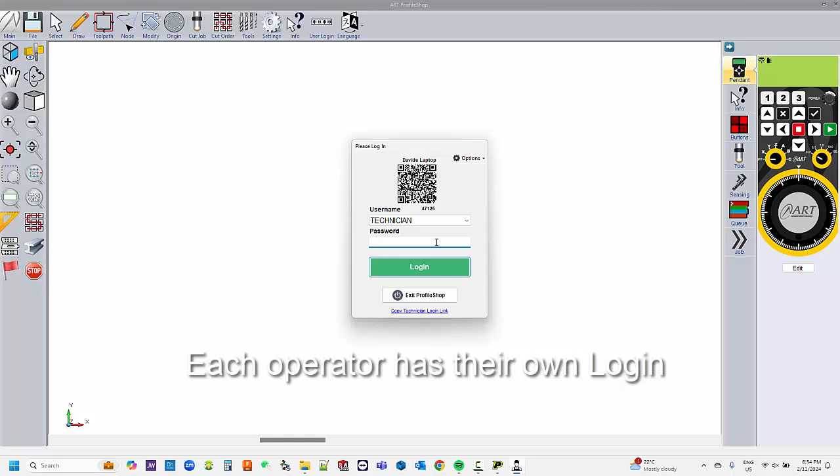Today we're taking a look at the world of steel fabrication, exploring a machine that's been making serious waves: the Metaltek XB1200. You might be thinking, okay, another piece of equipment, what's the big deal? But by the end of this deep dive, you'll see why it's an absolute game changer, especially for steel fabricators and structural engineers. What's fascinating is the convergence of trends in the industry right now. Steel fabricators are being asked to do more, faster, with tighter tolerances than ever before.

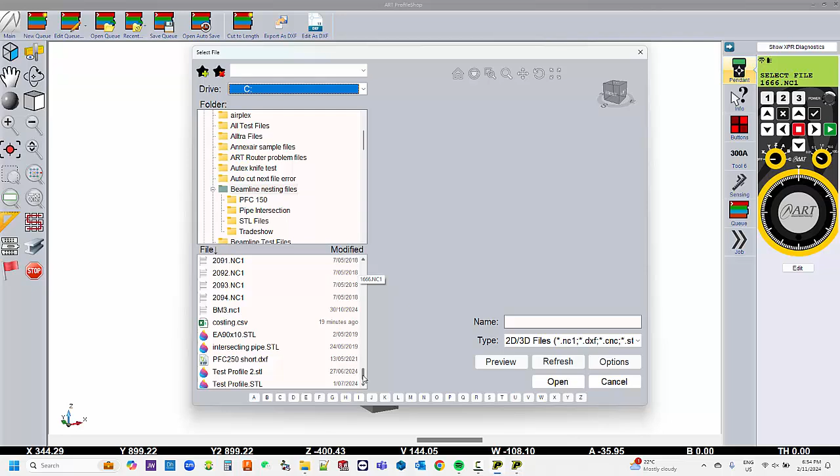At the same time, everybody's pushing towards digitizing workflows and using data to optimize production. The Metaltek XB1200 sits right at the intersection of all of that. We've got brochures, articles, even some technical specs here, all about this Metaltek XB1200.

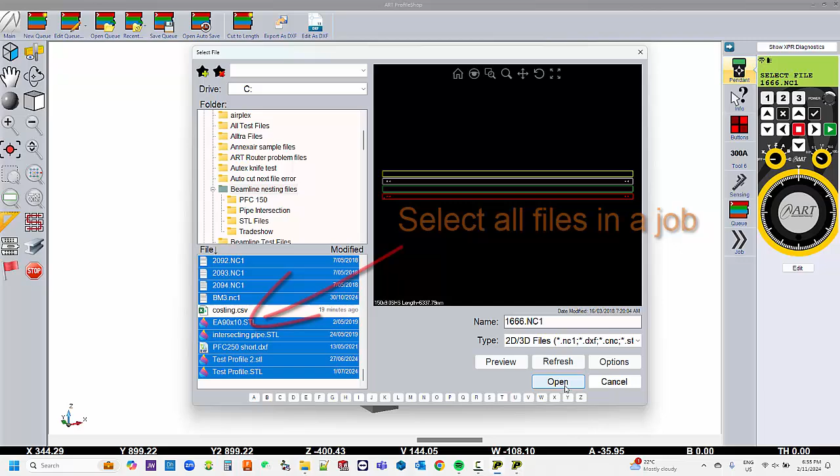One of the things that really jumps out is its versatility. It can handle pretty much any structural steel profile you can imagine: beams, columns, angles, pipes, flat plates, you name it. The Metaltek XB1200 is what's called a robotic CNC plasma beamline machine.

CNC stands for computer numerical control, which basically means it's guided by a computer for incredible precision. And plasma beamline refers to the cutting technology, super hot plasma that cuts through steel like butter.

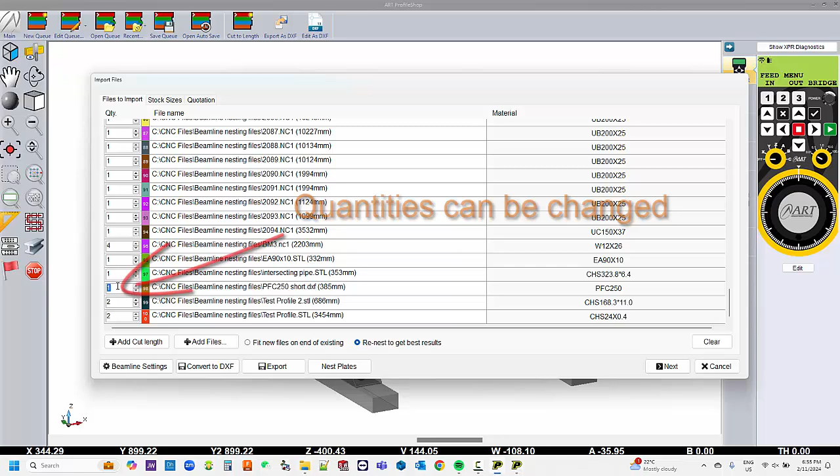That combination lets the XB1200 not only cut the steel with amazing accuracy, but also mark parts with things like part numbers and welding instructions, eliminating all those manual steps later on. So I'm already seeing how this saves a ton of time and reduces errors, but let's break it down even further.

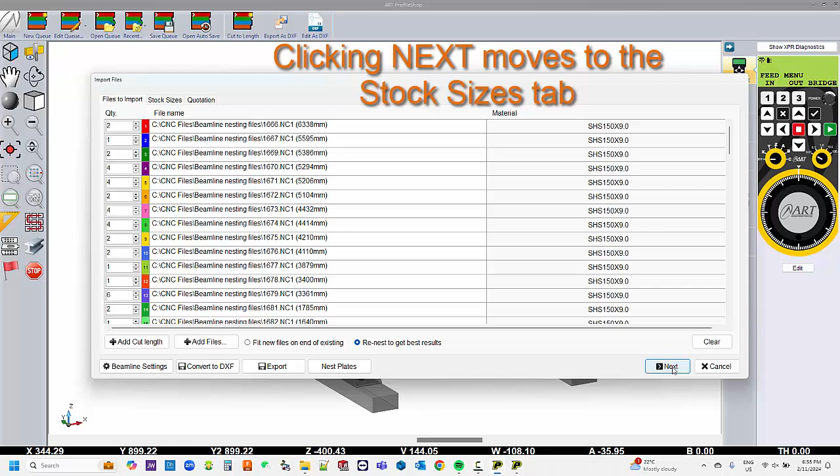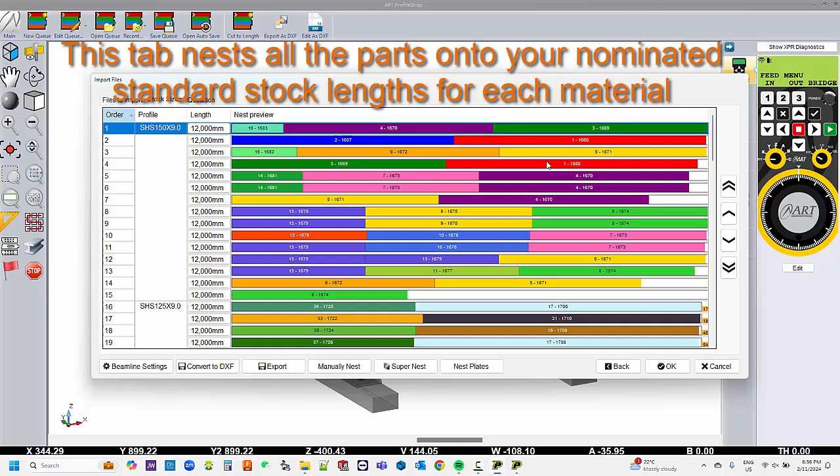The Metaltek XB1200 offers major benefits in three key areas: quality, productivity, and maybe most surprisingly, ease of use. Starting with quality, the XB1200 uses true hole technology, which ensures every hole is cut to the exact size and shape with no taper. So when you go to put a bolt in, it fits perfectly every single time. That's got to be a dream come true for any fabricator.

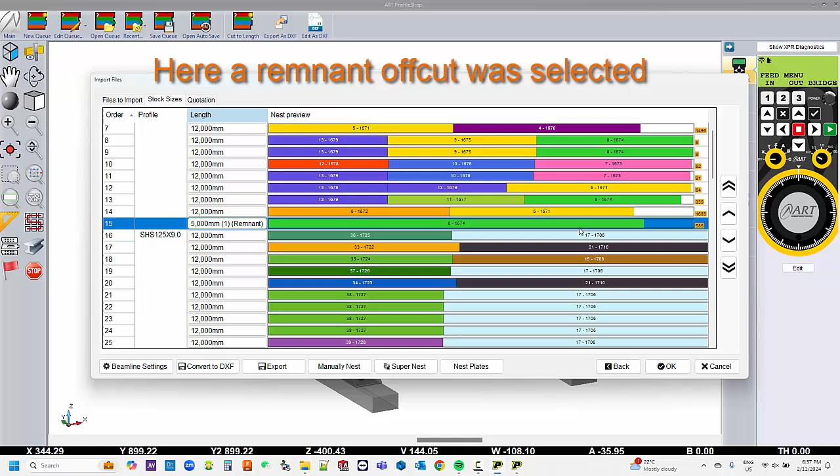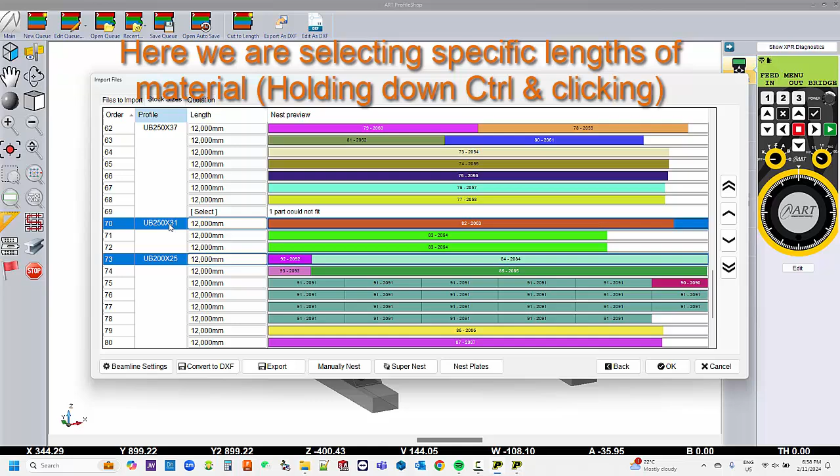No more time wasted trying to force ill-fitting parts together. And speaking of saving time, let's talk productivity. The XB1200 has a whole arsenal of features designed to streamline the fabrication process. For one thing, it's got this user-friendly touchscreen controller, the ART ProfileShop V4, that lets operators modify the cutting parameters on the fly, so you don't have to stop the whole process and reprogram the machine.

What really catches my eye is this wireless remote control. It's almost like controlling a giant robot with your smartphone. That gives operators way more flexibility and control on the shop floor, so they can align and set up jobs faster without being tethered to a control panel.

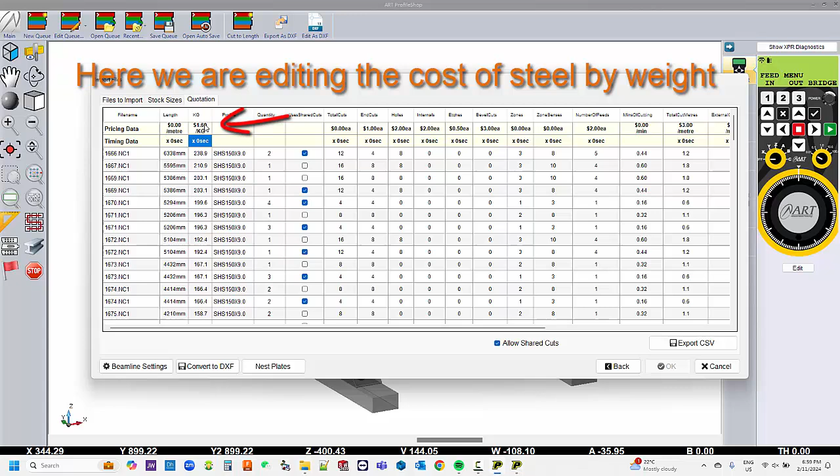Then there's the etch marking feature we touched on earlier, which automatically adds part numbers, welding instructions, alignment marks, basically all the information needed for downstream processes right onto the steel parts. It's amazing how they've thought of every little detail to maximize efficiency, like they sat down with experienced fabricators and said, tell us your biggest pain points and we'll engineer solutions for you.

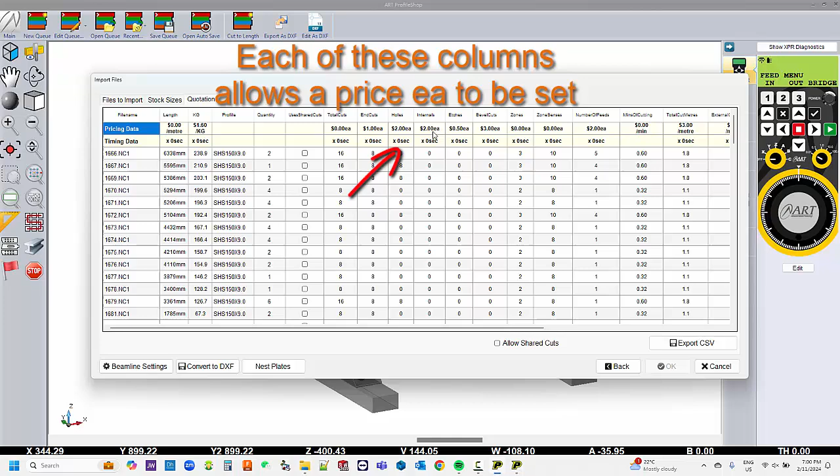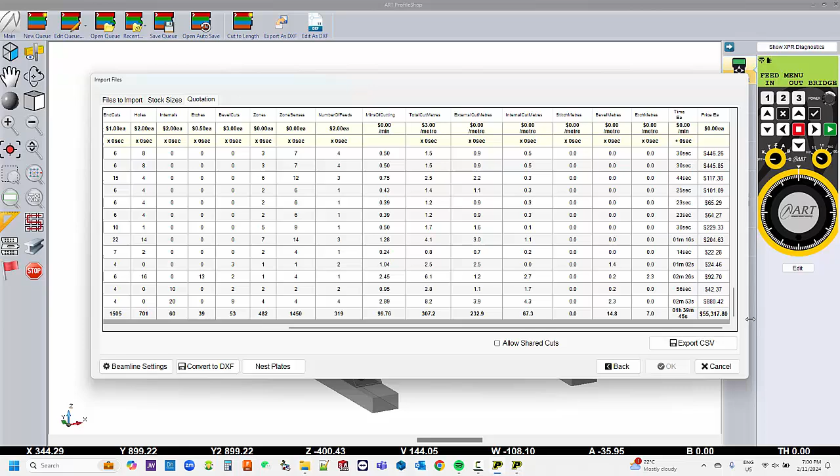And they didn't stop there. The XB1200 also excels in integrated workflow, able to integrate with existing CAD and MRP systems. So you can take a design straight from your CAD software and send it right to the XB1200, no manual data entry or file conversions. That streamlines the data transfer, eliminates potential errors, and makes the whole process incredibly efficient.

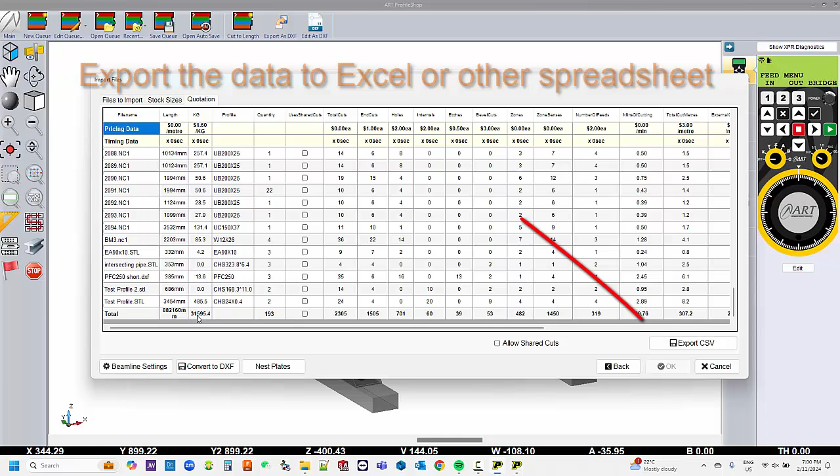And for those who love data, the XB1200 provides real-time reporting on things like cut times, consumable usage, and completed parts.

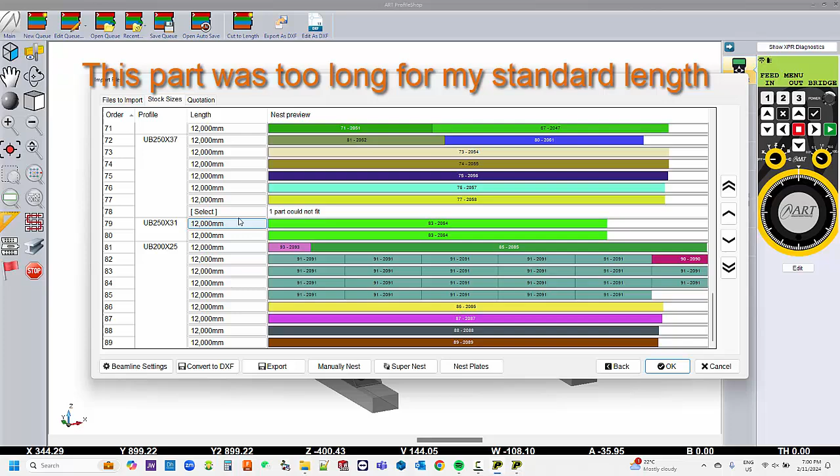That kind of data can be super valuable for optimizing production, identifying bottlenecks, and making data-driven decisions. It's like having a built-in efficiency expert right there on the shop floor.

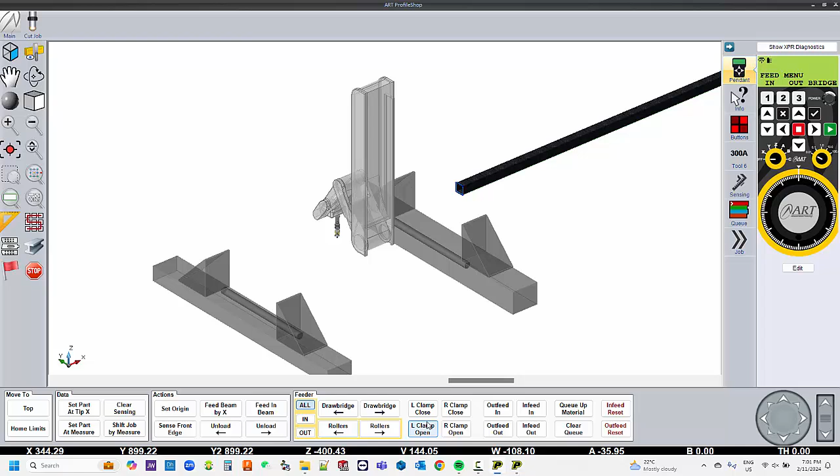But it's not just about speed and data. The XB1200 also seems to really prioritize safety. ART has built in a ton of safety features. The automatic fume extraction and filtration systems, for example, meet the strictest OH&S requirements, creating a safer, cleaner environment.

Cleaner air, less noise pollution, benefits we can all appreciate. It really shows a commitment to responsible manufacturing, which we're seeing more and more companies prioritize.

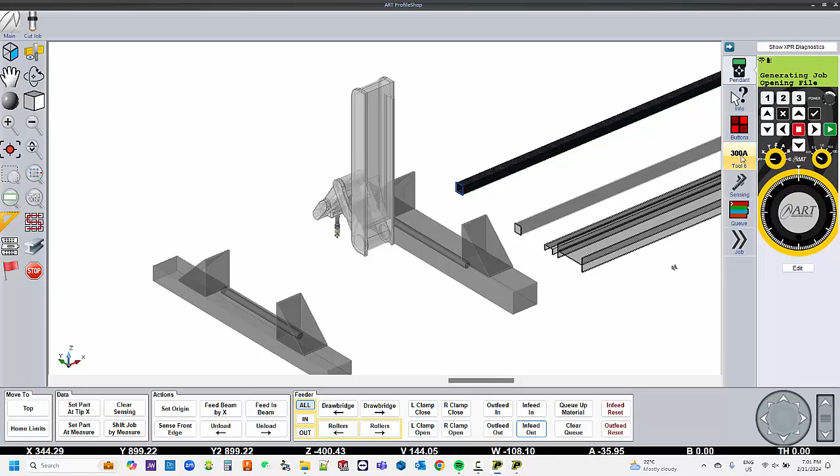So we've covered quality, productivity, and the positive impact on safety and the environment. But this machine sounds incredibly sophisticated. How do you even begin to operate something like this? That's where the ease of use comes in. ART has gone to great lengths to make the XB1200 surprisingly user-friendly.

It's got wireless networking for easy integration with computer systems. Thank goodness, you don't have to run cables all over the shop floor.

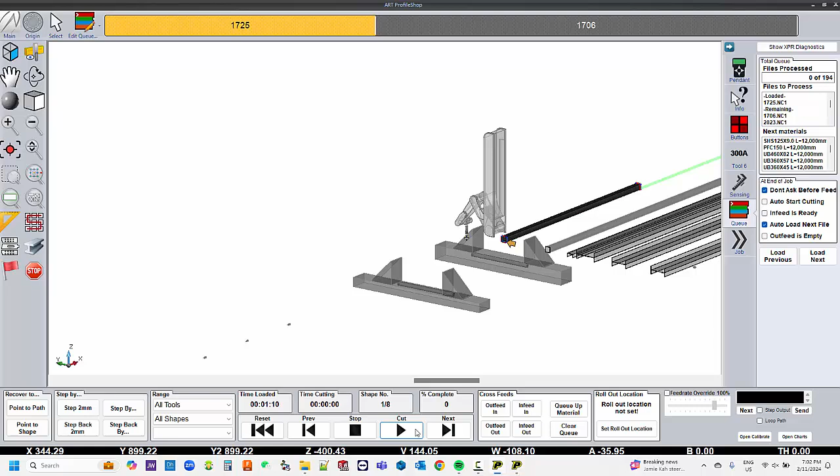But what if you do run into a problem? Is there support available? Absolutely, they offer remote access for on-demand technical support. So if you've got a question or an issue, help is just a click away.

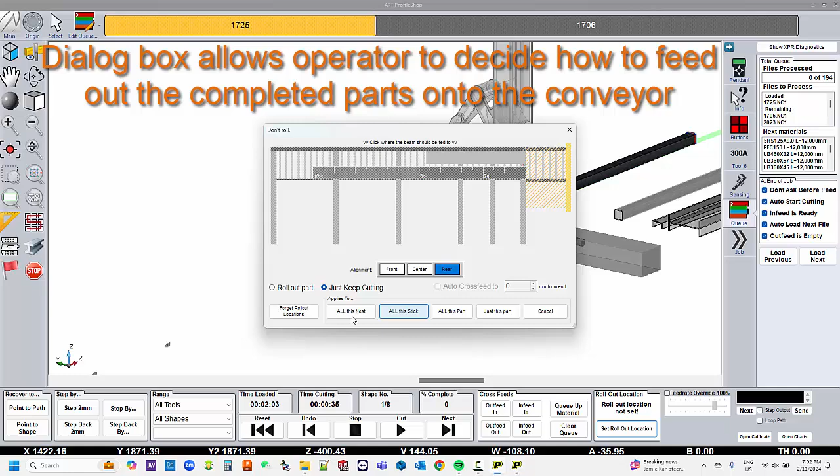And to make sure operators are confident and skilled, ART provides a bunch of different training options, both on-site and at their factory. So whether you're a seasoned fabricator or just starting out, you've got the support you need to really get the most out of the XB1200.

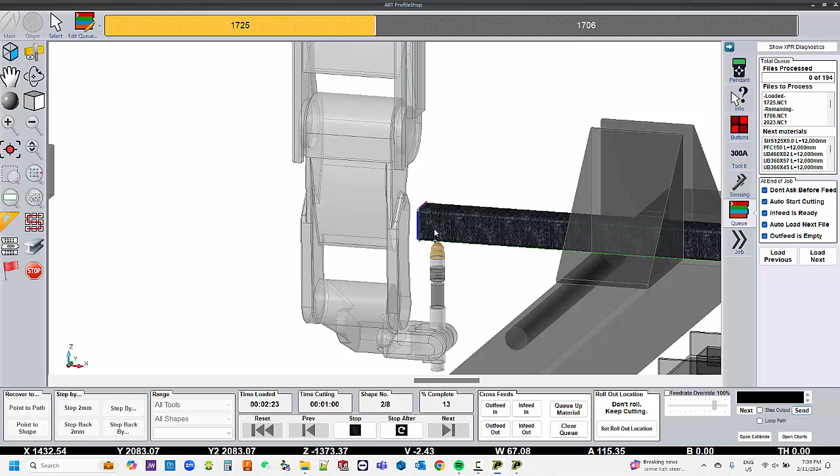Let's dive into some of its more specific capabilities. One that really stands out is the automatic material handling. Imagine a system where steel beams, columns, plates are automatically loaded, moved through the machine for processing and outputted, all with minimal manual intervention. That's what the XB1200's in-feed and out-feed conveyor system does. It's like this perfectly choreographed dance of steel, minimizing manual labor, streamlining the whole workflow.

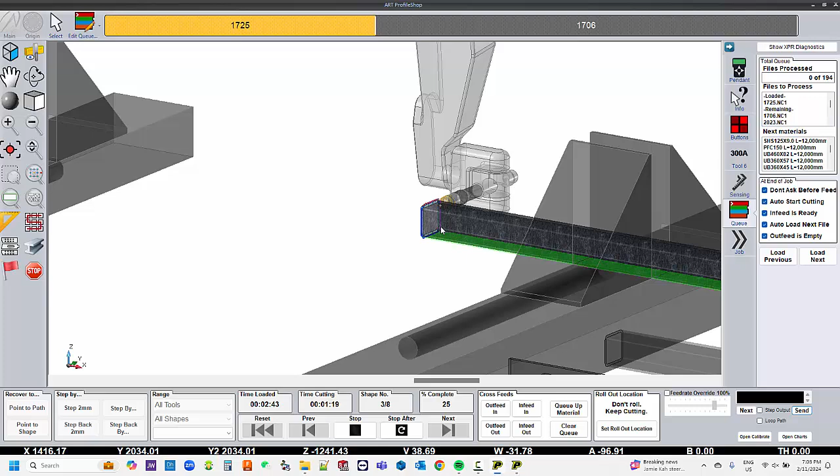What else can this thing do? Remember the robotic arm? That arm doesn't just move material around. It lets the XB1200 cut and mark on all sides of a piece of steel, even underneath. So you're telling me you can cut a rectangular hollow section on all four sides, including those tricky 45-degree bevels. Exactly. It opens up a whole world of possibilities for complex cuts and fabrications.

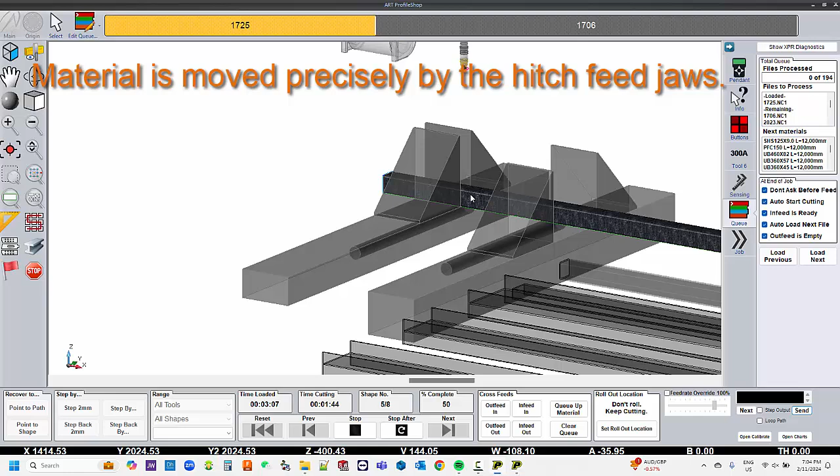My mind is blown. And you mentioned it uses Hypertherm XPR technology for plasma cutting. What makes that so special? Hypertherm is the world leader in plasma cutting technology, and their XPR systems are known for speed, precision, and cut quality. The cuts are cleaner, there's less material waste, and the consumables last longer, which saves you money in the long run.

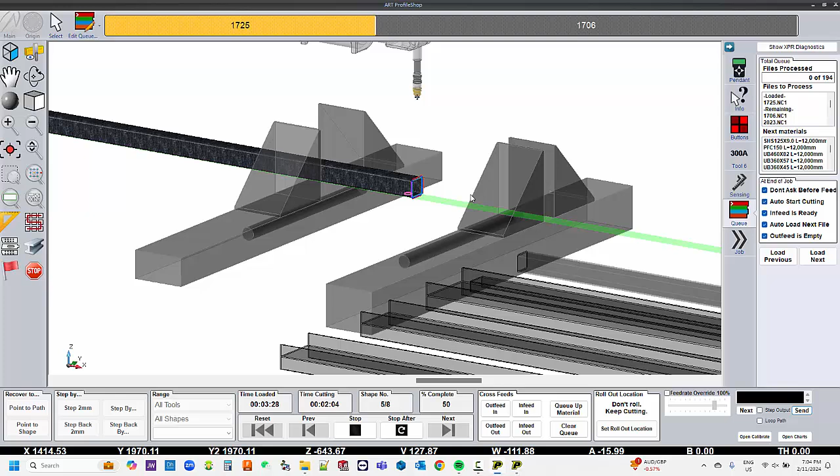So it's not just about the features themselves, it's about the quality and reliability of the components as well. But with all this talk about high-tech features, I'm sure some listeners are wondering, how practical is this machine really for a typical steel fabrication shop? Do you need special software or training to operate it?

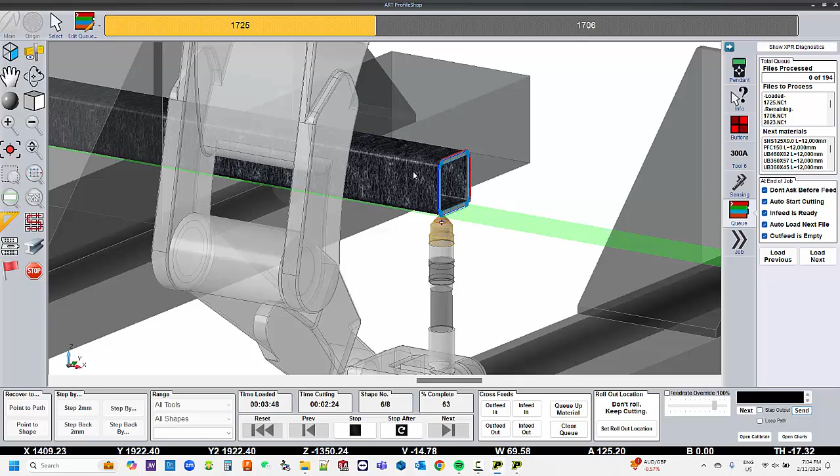Luckily, we've got some answers. Let's tackle some frequently asked questions. First, software compatibility. Do you have to invest in expensive proprietary software to run the XB1200? Please tell me it's not another software subscription I have to worry about. Nope, the answer is no. The XB1200 is designed to integrate seamlessly with the software you're already using.

It can import files from standard CAD programs, Tekla, AutoCAD, ProSteel. No need to learn a whole new system or spend hours converting files. Huge relief. Sounds like they really thought about making this machine as accessible as possible.

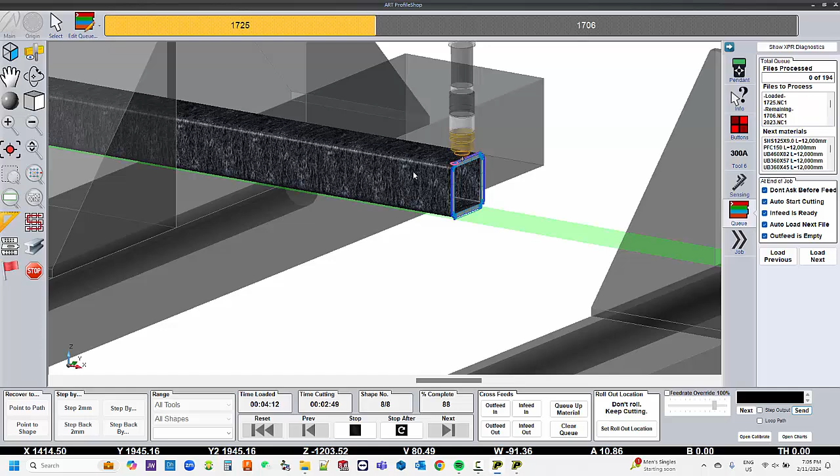But what about file types? Can it handle a variety of formats? Absolutely, NC1, DXF, even 3D models like STL and STP. It's truly multilingual when it comes to file formats. So no matter what software you're using or what type of files you're working with, the XB1200 can handle it.

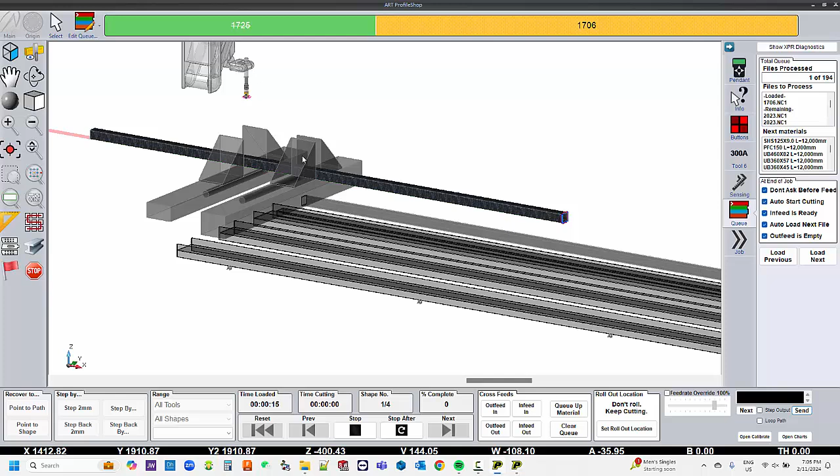Impressive. But let's get down to brass tacks. How do you price jobs on this thing? The controller is really smart about this. It gives you a detailed spreadsheet that takes into account all the variables of a job.

Number of cuts, holes, material length, etch marking details — you can use this to create accurate customized quotes. No more guesswork or relying on outdated pricing models. That's a level of precision any business owner would appreciate.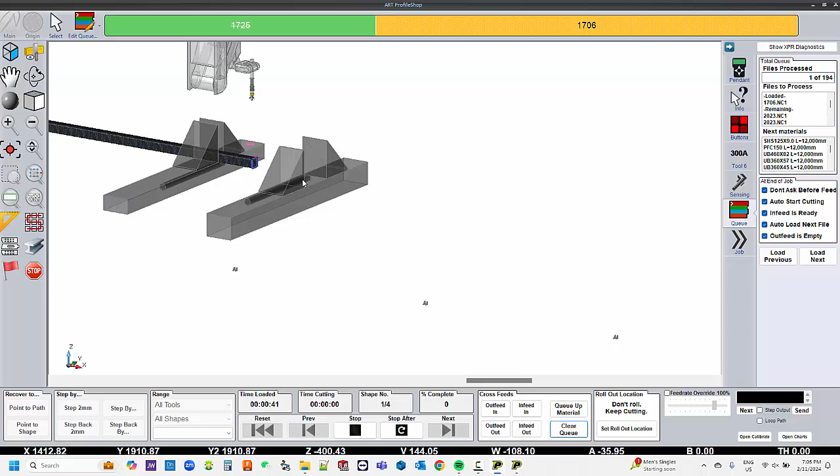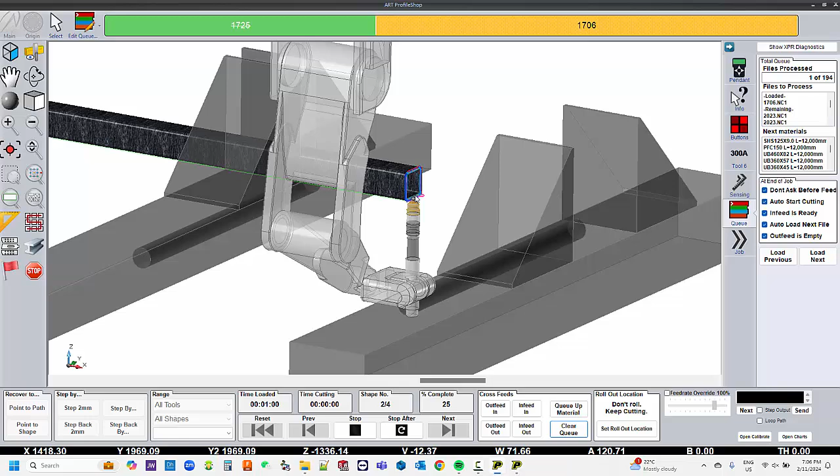What about those moments when you want to double-check everything before you actually commit to a cut? Is there a way to preview the file? Of course. The controller has a built-in preview function, so you can see exactly what the machine's going to do before you hit go. And there's even a desktop version of the software, so draftspersons can check files in the office before they're sent to the shop floor. Talk about peace of mind, knowing that you can catch any potential errors before they become costly mistakes.

Speaking of minimizing costs, are there any hidden fees for extra functionality? Do you need to buy separate modules to unlock all of the XB1200's capabilities? Nope. The XB1200 comes fully loaded — all the features we've been talking about, from 360-degree processing to etch marking, automatic material handling — they're all included right out of the box. So no hidden costs, no surprise upgrades, just pure steel cutting power.

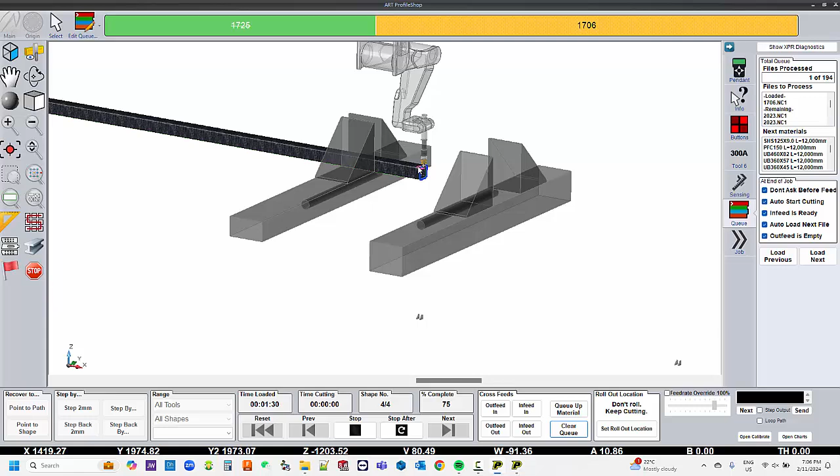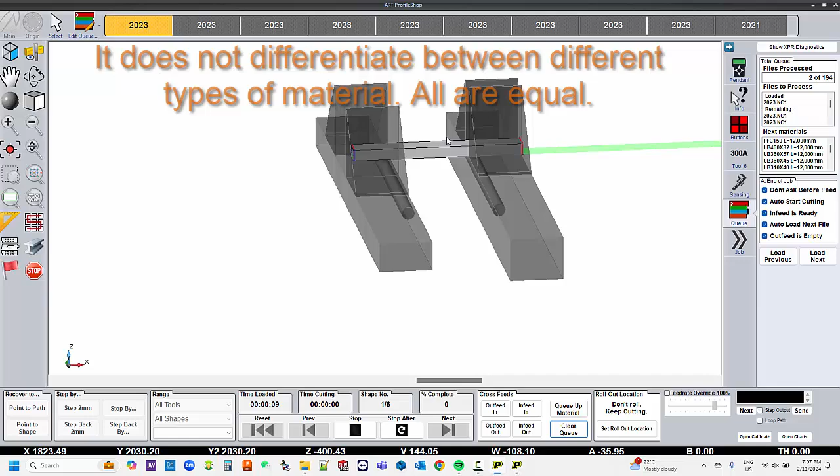Precisely. And to make sure the transition is smooth, ART offers a bunch of support options, including on-site and factory-based training. So whether you prefer to learn in your own facility or at the ART factory, they've got you covered. It sounds like ART isn't just selling a machine, they're providing a complete solution — training, support and peace of mind. But we're just scratching the surface here. There's so much more to explore about the XB1200 and its potential to totally revolutionize steel fabrication.

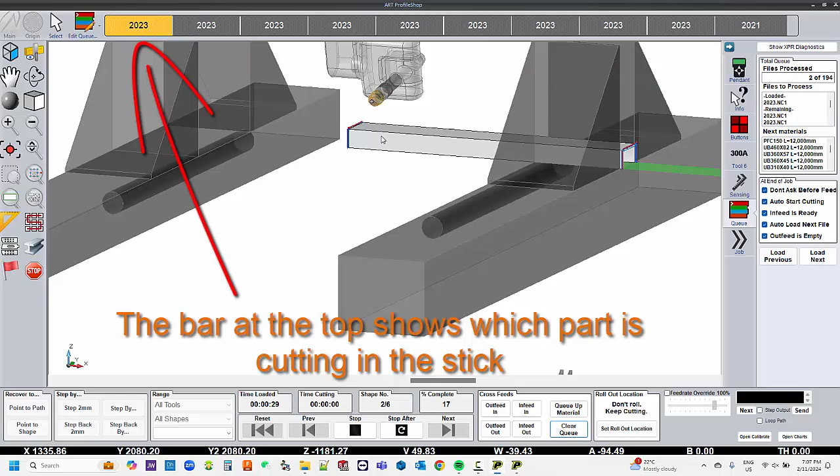One of the things that I find really exciting about the Metaltek XB1200 is how it's changing the nature of work in steel fabrication. We talked about the safety and efficiency aspects, of course, but what do you mean by changing the nature of the work itself? Well, traditionally, steel fabrication has been very labor-intensive, relied on skilled workers to do a lot of manual tasks. But with the XB1200, we're seeing a shift from manual labor to skilled oversight and management. So instead of replacing jobs, this machine is actually enhancing the skills of those workers.

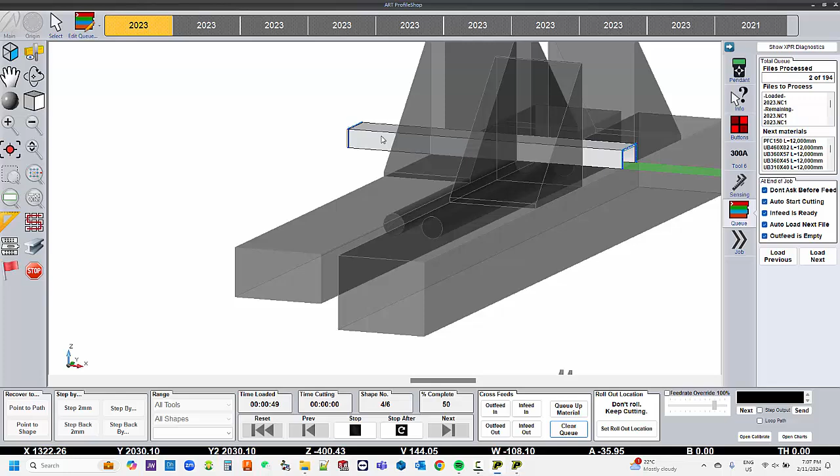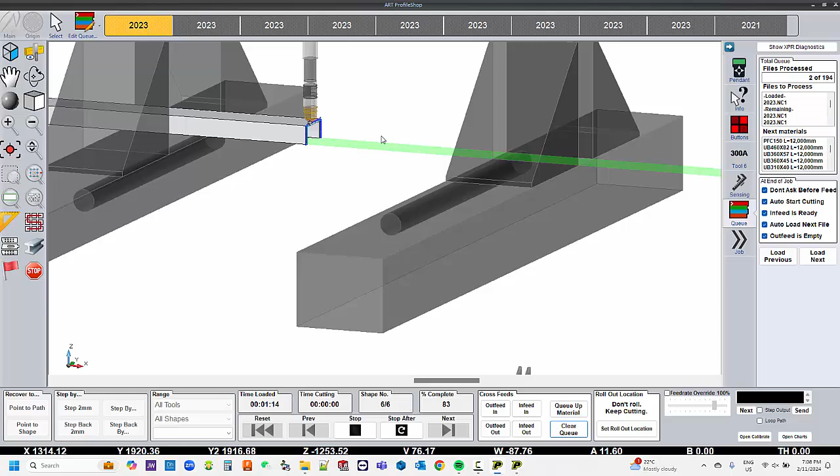Exactly. Think of it as giving those skilled fabricators superpowers. Instead of spending hours on tedious measurements and markings, they can use the XB1200 to handle those repetitive tasks. And this frees them up to focus on things like problem-solving, quality control, and even refining designs. It's kind of a shift from brawn to brains in a way. Exactly, and that's where the real value lies. It's about harnessing technology to augment human capabilities, not replace them. It's a really cool synergy of human ingenuity and technological advancement, creating a more efficient and rewarding work environment.

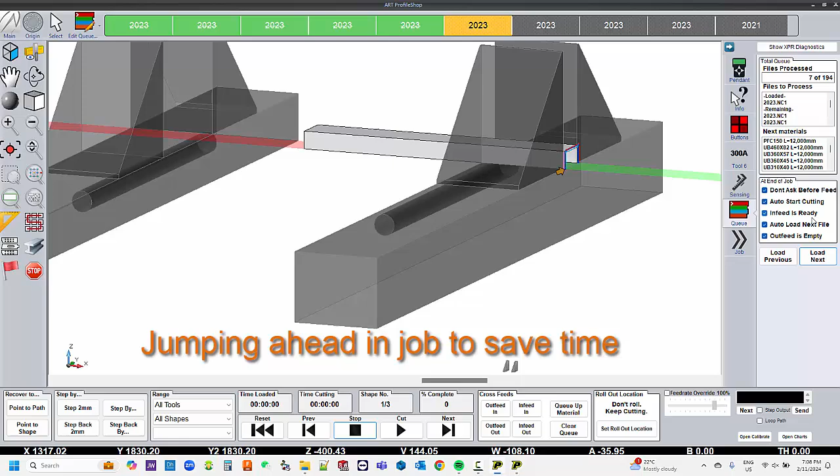Yeah, it is, and this is just the beginning. As technology keeps evolving, we can expect even more innovative solutions like the XB1200 to emerge, further transforming the landscape of steel fabrication and construction. It really is an exciting time to be in this industry. With machines like this paving the way, who knows what incredible structures we'll be able to create in the future — buildings rising with crazy speed and precision, intricate designs that were once impossible becoming commonplace. The possibilities really are limitless.

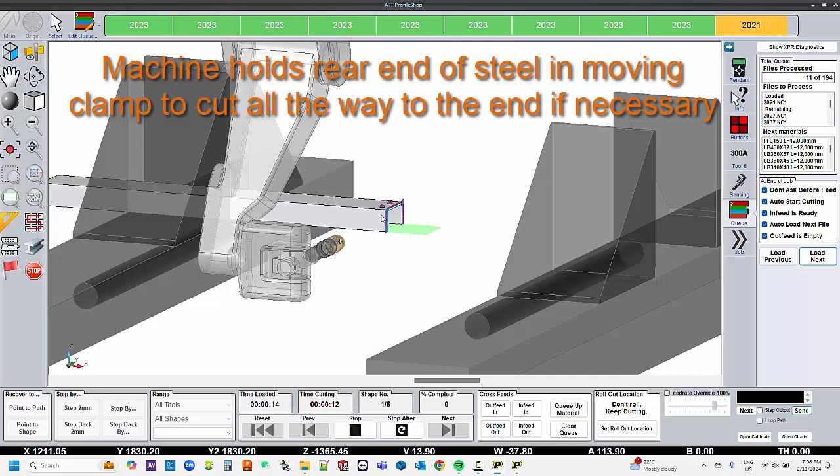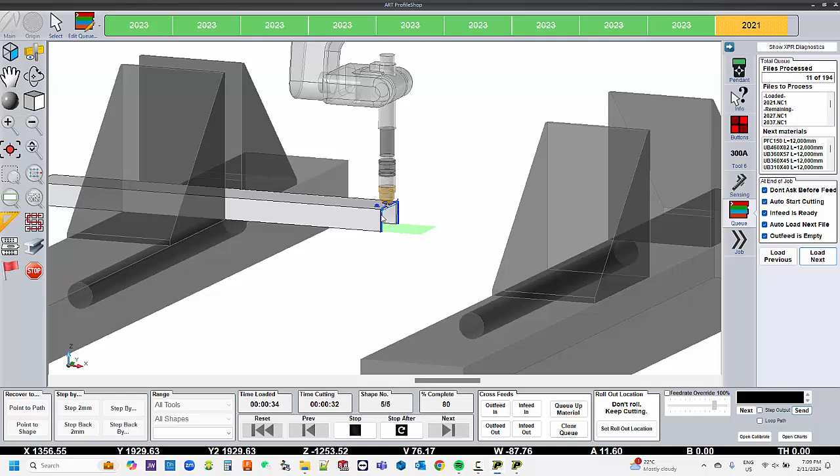And let's not forget about the sustainability aspect. With the increased efficiency and reduced waste, we could even see a more sustainable approach to construction overall. Optimizing material usage, minimizing errors — we can significantly reduce the environmental impact of steel fabrication. It's a win-win for both the industry and the planet. It really is a testament to the power of innovation and collaboration. When engineers, designers, and manufacturers come together with a shared vision, incredible things can happen.

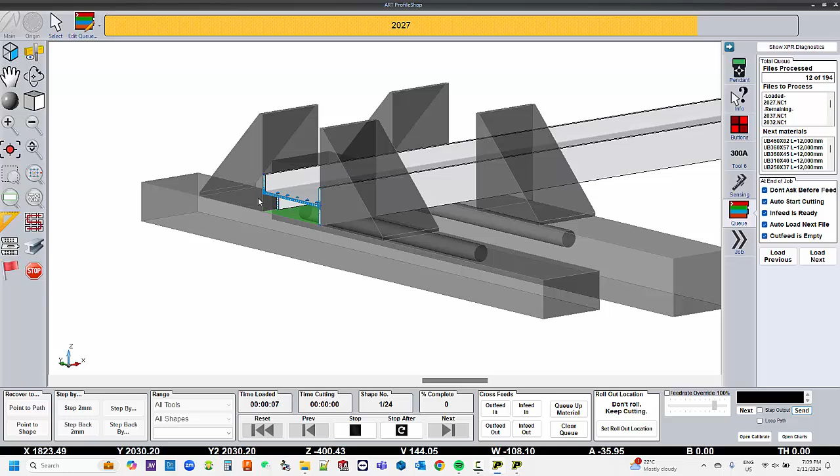Great idea, let's tackle some of those frequently asked questions we got. First one: space requirements. What kind of space do you need to install this machine? It sounds like a pretty substantial piece of equipment. That's a great question.

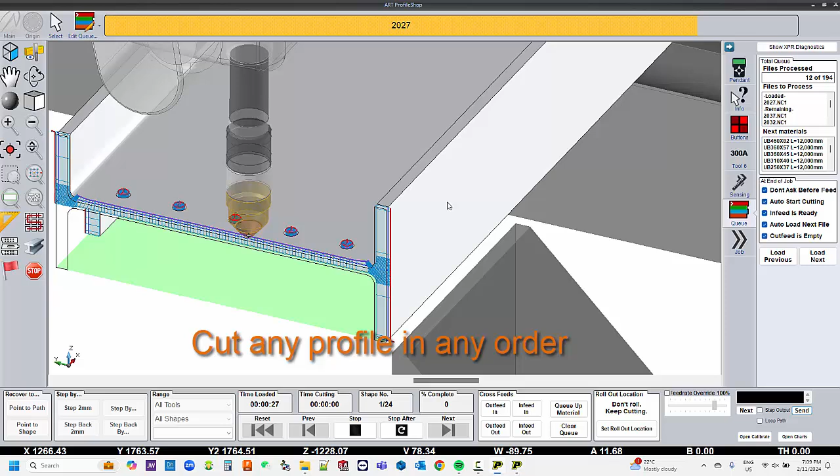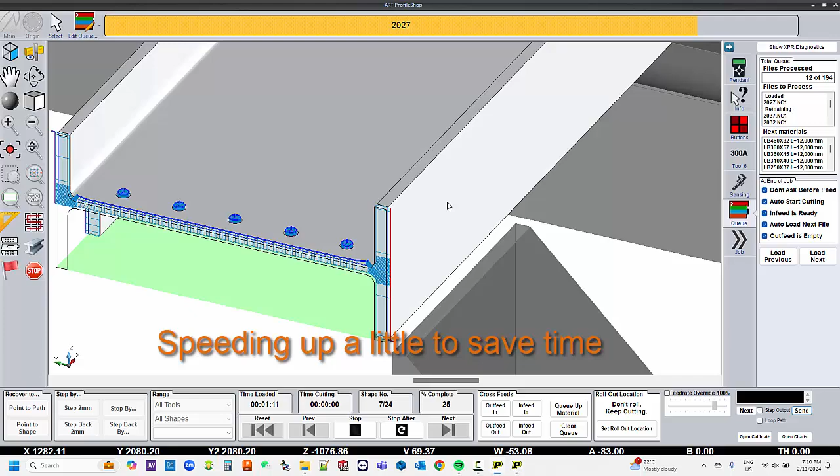The XB1200 is a robust machine, but it's surprisingly compact given its capabilities. The exact footprint will vary depending on the specific configuration and material handling options you go with. But generally speaking, you'll need a dedicated area that can accommodate the machine's length and width, plus clearance for material loading and unloading. So not something you can just tuck away in a corner.

Probably not. But ART provides detailed layout plans and installation guidance to make sure it integrates smoothly into your workspace. They work closely with their customers to optimize the setup for maximum efficiency and safety.

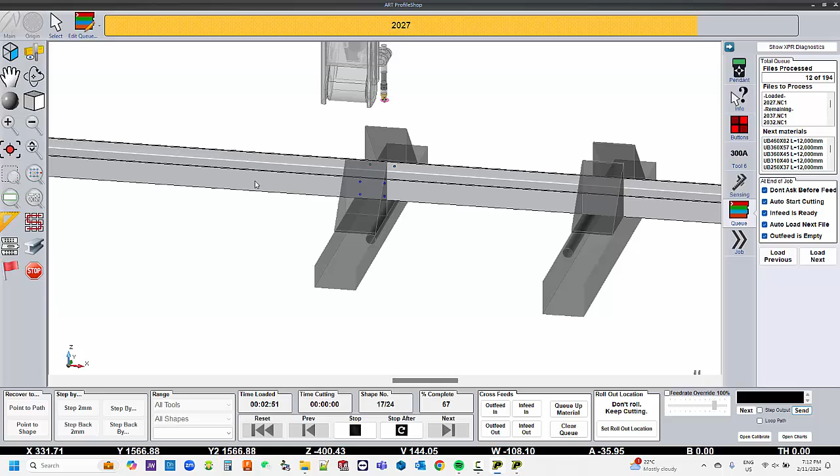Speaking of safety, what kind of safety features are built into the XB1200? We already talked about the fume extraction system. But are there other measures in place to protect operators? Absolutely. Safety is a top priority for ART. The XB1200 is equipped with a whole bunch of safety features.

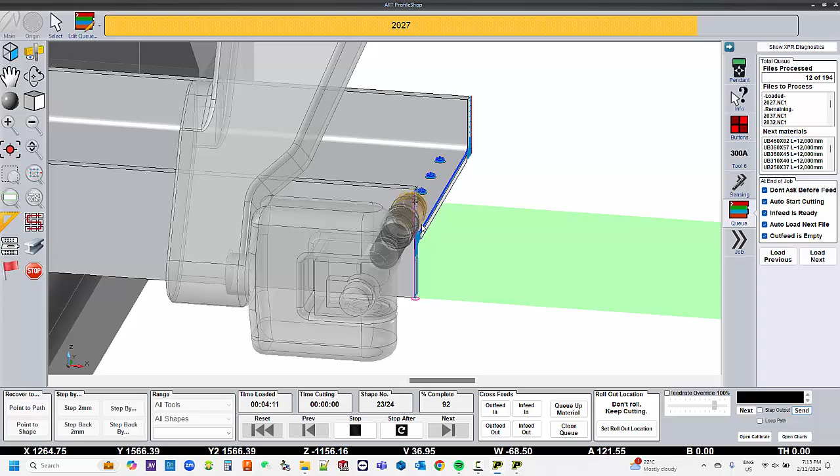They use what are called light curtains, for example. Light curtains, I've never heard of those. These light curtains create an invisible safety barrier around the machine. If anything breaks the beam, the machine automatically stops, preventing accidents. So it's like an invisible force field protecting the operators.

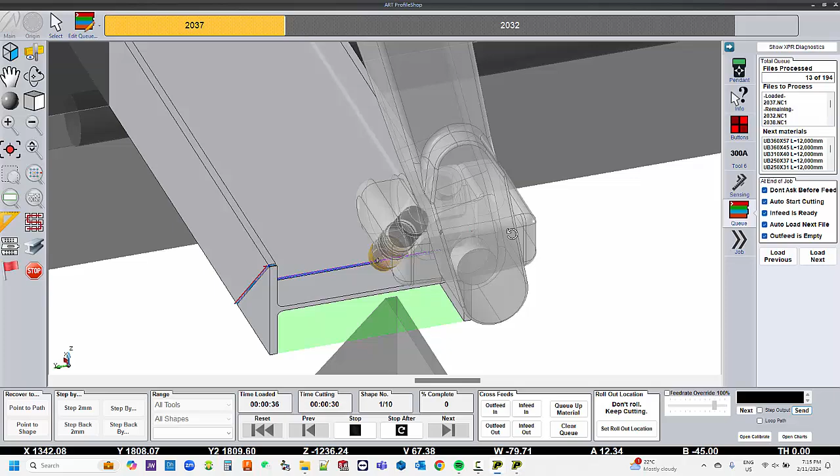Pretty much. In addition to the light curtains, the XB1200 also has emergency stop buttons located all around the machine, safety interlocks to prevent operation when doors or access panels are open, and warning lights and alarms to alert operators of potential issues. So multiple layers of protection to make sure operators can work confidently and safely.

Exactly. And ART provides thorough training on all the safety procedures, emphasizing the importance of a safety-first culture in the workplace. They've really taken a holistic approach to safety, considering both the design of the machine and the training of the operators.

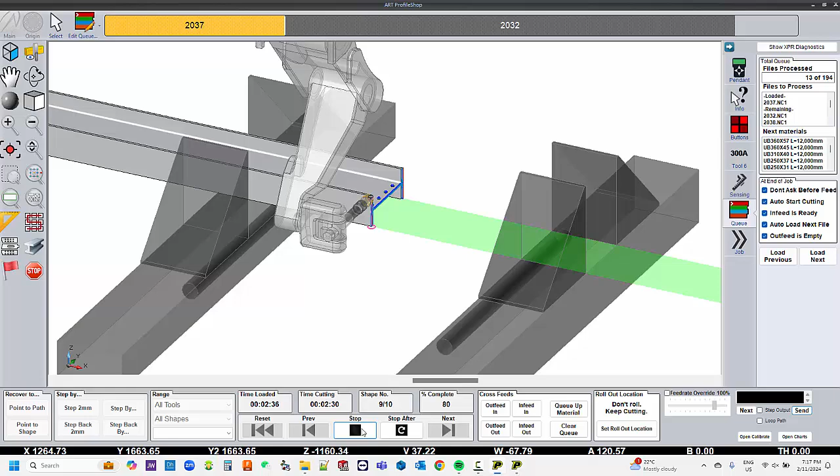Let's switch gears and talk about maintenance. With such a sophisticated piece of equipment, I imagine there are specific maintenance requirements to keep it running smoothly. You're right. Like any high-performance machine, the XB1200 benefits from regular maintenance. But ART designed the machine with ease of maintenance in mind.

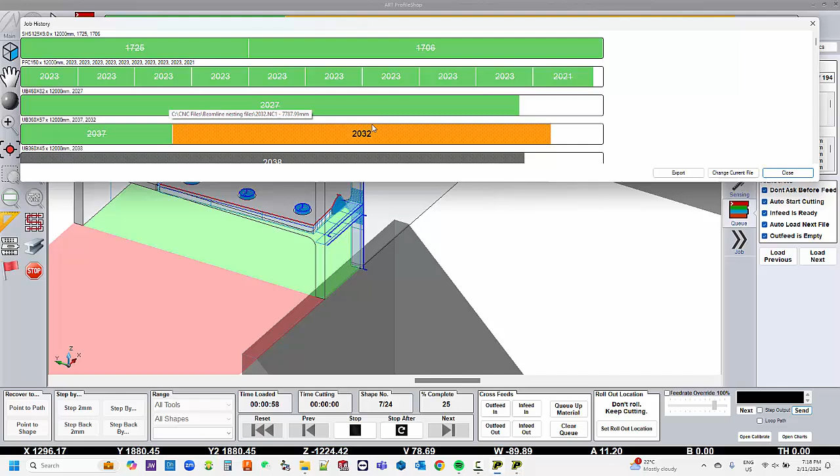How so? Well, they provide a comprehensive maintenance manual that outlines all the recommended procedures and schedules, giving you a clear roadmap to follow, and they design the machine with easy access to key components. So routine tasks like lubrication and cleaning are straightforward — no need to dismantle half the machine just to check the oil levels.

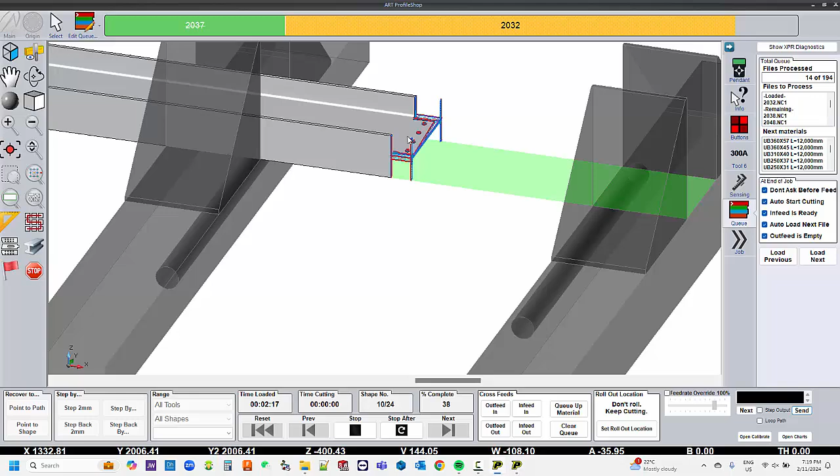Nope. And in addition to routine maintenance, ART offers a range of support options, including remote diagnostics and troubleshooting, preventative maintenance contracts, and on-site technical support. So whether you need help troubleshooting an issue, or you just want to schedule a preventative maintenance check, they've got you covered. Their goal is to minimize downtime and keep your XB1200 running at peak performance.

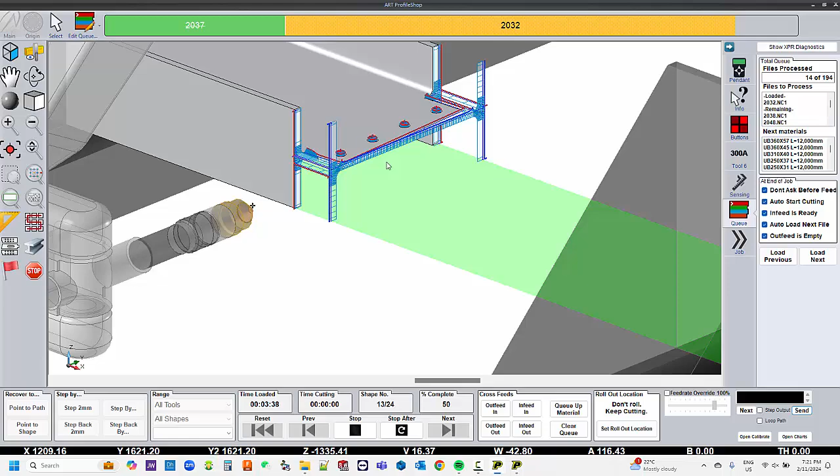It sounds like they're really invested in the success of their customers. They are. They understand that a machine is only as good as the support behind it. Well said. Now, before we wrap up this part of the deep dive...

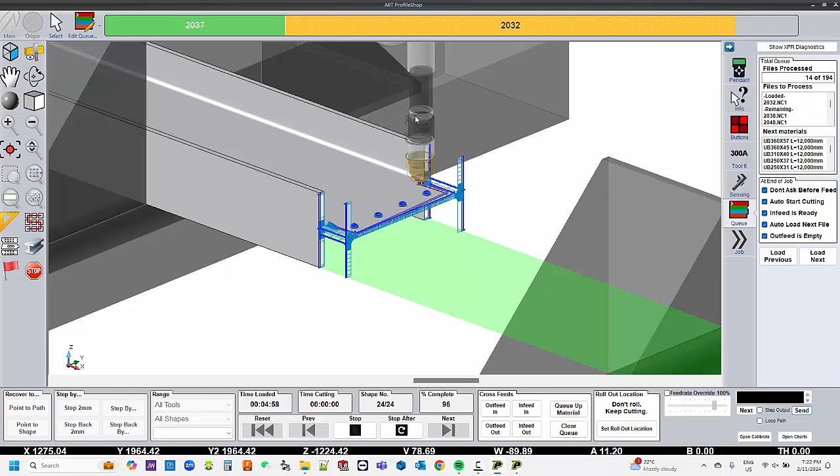I want to touch on a topic that's becoming increasingly important these days: sustainability. We already mentioned how the XB1200 can help reduce waste by optimizing material usage. But are there other aspects of the machine's design or operation that contribute to a more sustainable approach to steel fabrication? That's a great question, and it's one that ART takes very seriously.

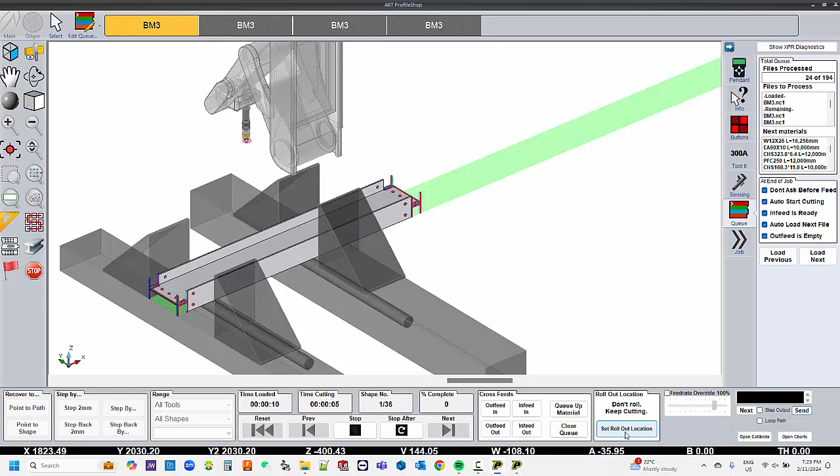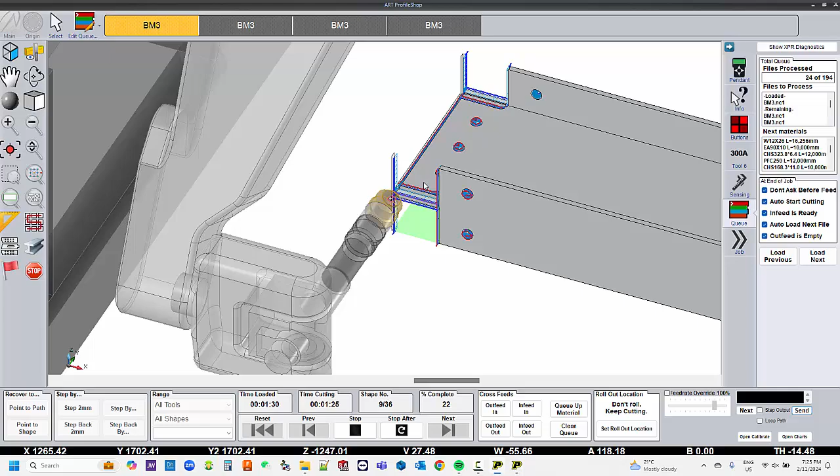In addition to minimizing material waste through precise cutting and nesting, the XB1200 has several features that promote sustainability. For one thing, it uses energy-efficient motors and drives, reducing its overall energy consumption. The Hypertherm XPR plasma cutting technology itself is designed for high energy efficiency and minimal consumable usage. And the fume extraction and filtration systems not only create a healthier work environment, but also minimize the release of pollutants into the atmosphere.

So it's not just about what the machine can do, it's about how it does it. ART is clearly committed to developing technologies that are both innovative and responsible, minimizing the environmental impact of steel fabrication. Absolutely. They're leading the way in sustainable manufacturing, proving that you can achieve both economic success and environmental responsibility.

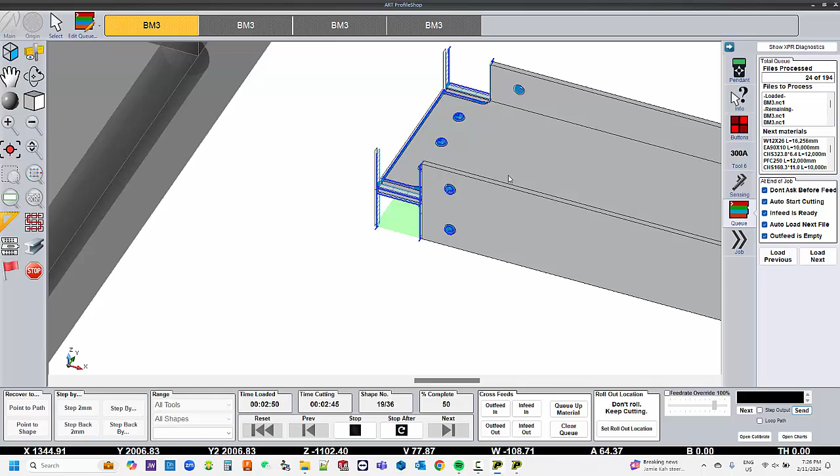It's encouraging to see. Okay, we've covered a lot in this part of the deep dive. We've explored some practical considerations, like space requirements, safety features, and maintenance. And we've talked about the XB1200's commitment to sustainability. But there's one more crucial aspect we need to discuss: the impact of this technology on the workforce.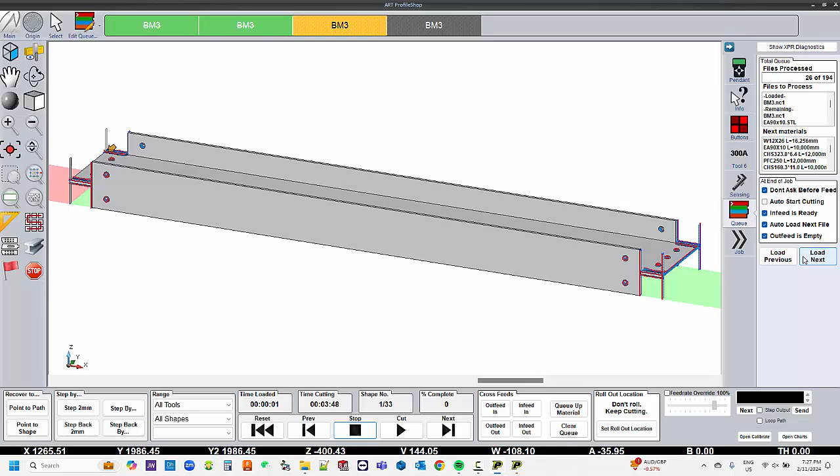Stay tuned for the final part of this deep dive where we'll tackle that very question.

Okay, so we've talked about how the Metaltek XB1200 is like a total game changer in terms of quality, productivity, and sustainability. But there's one question that I think is probably on a lot of people's minds: what does all this mean for the future of steel fabrication jobs?

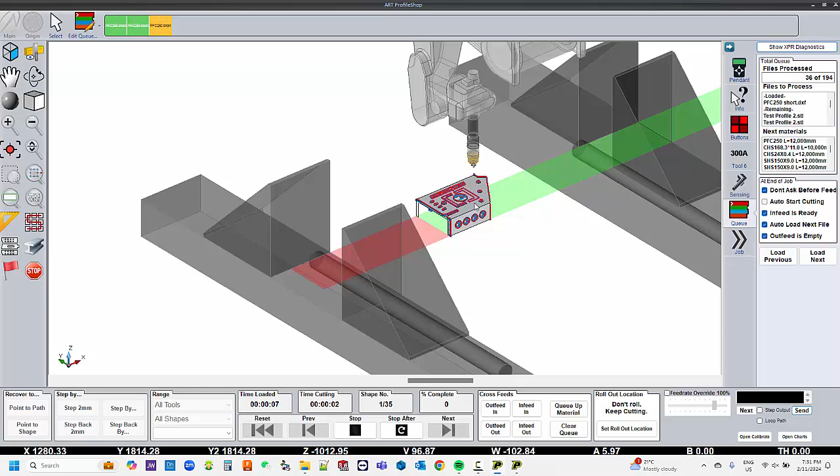Yeah, it's a totally valid concern, and one that deserves to be talked about. Whenever we see new technology come along, especially automation, there's that natural worry about jobs being replaced. But I think it's really important to look at this shift from a different perspective. Okay, how should we be thinking about it?

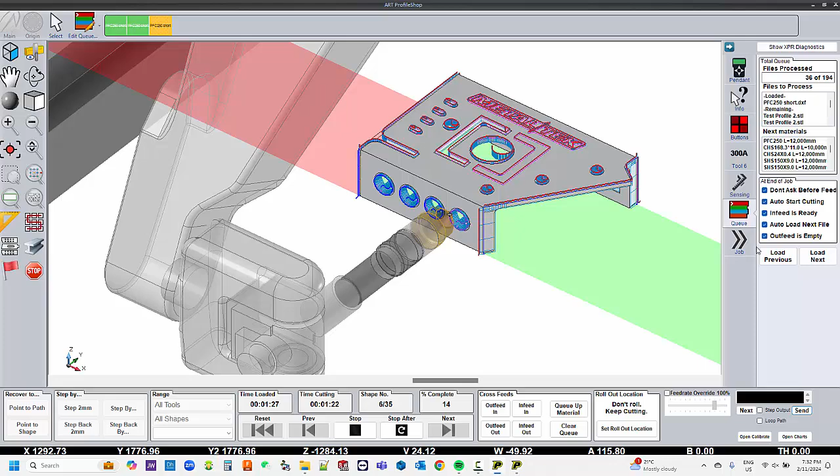Instead of seeing automation as this big scary threat, let's see it as an opportunity. The Metaltek XB1200 and machines like it have the potential to actually elevate the role of the steel fabricator. Okay, I'm listening. How does it do that?

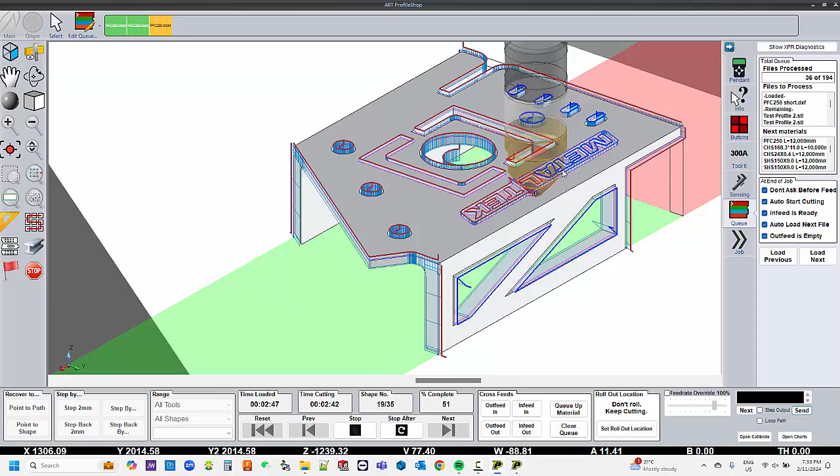Well, think about the kinds of tasks that the XB1200 automates. They're repetitive, physically demanding, sometimes even dangerous jobs. By taking those over, the machine actually frees up skilled workers to focus on more high-level responsibilities.

So instead of manually measuring, marking, and cutting, they can focus on things like quality control, problem solving, maybe even design optimization. Exactly. They become the supervisors, the overseers, the masterminds behind the whole operation. They program the machine, monitor its performance, troubleshoot any issues, and make sure the final product meets the highest standards. So it's a shift from manual labor to a more knowledge-based technical role.

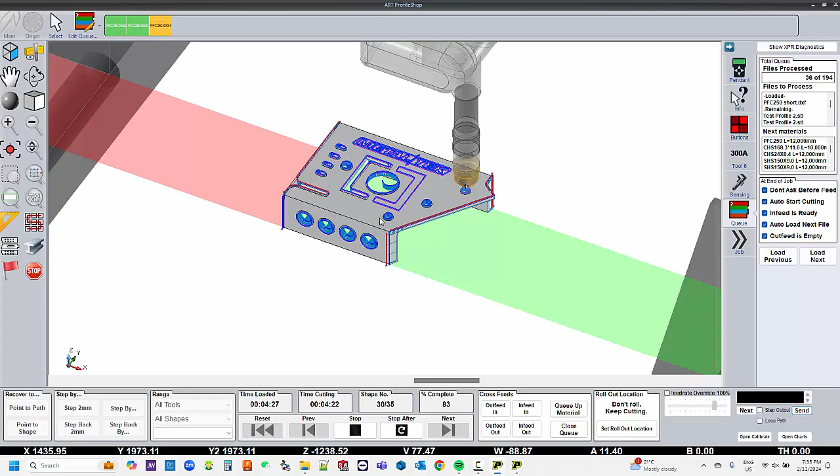Right. And that obviously requires a new set of skills: programming, data analysis, problem solving, and a deep understanding of the whole fabrication process.

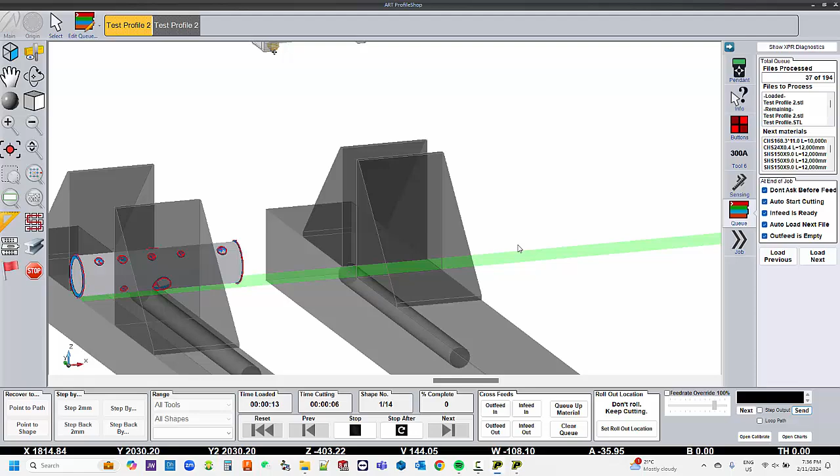It sounds like this is going to require some changes in terms of training and education, too. For sure. We've got to make sure the next generation of steel fabricators have the skills and knowledge they need to really thrive in this new environment. That means investing in training programs that combine hands-on experience with theoretical knowledge, teaching them how to operate, maintain, and even program these sophisticated machines.

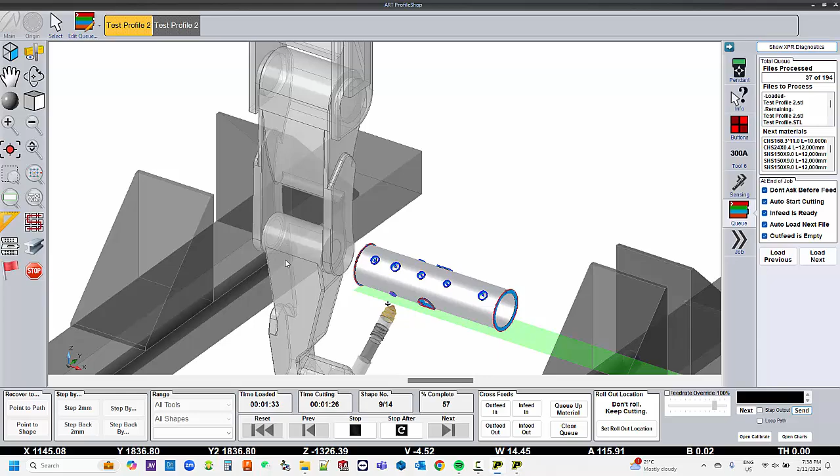So it's not just about teaching them how to push buttons. It's about giving them the tools to really think critically, solve problems, and adapt to new technologies as they come along. Absolutely. And it's not just the responsibility of schools and stuff either.

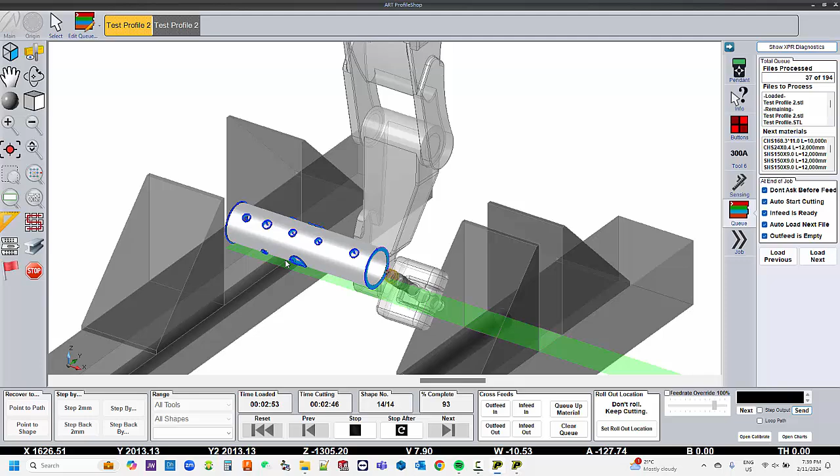Companies like ART have a role to play as well, offering training programs to their customers and working with schools to develop relevant curricula. So it's a big collaborative effort: industry, educators, government, all working together to make sure the workforce is prepared for the future of steel fabrication.

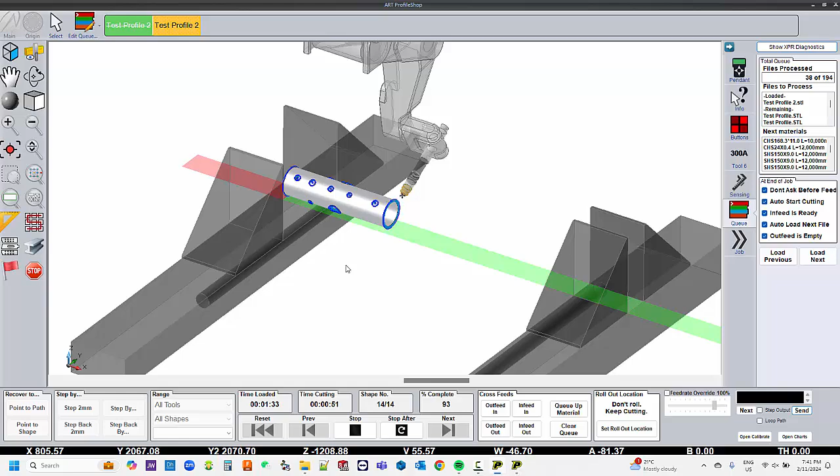Exactly. And we can't forget about the potential for new jobs to be created. As more companies embrace automation, we'll probably see an increase in demand for skilled technicians, programmers, and engineers, the people who can design, build, and maintain these complex systems. So while some traditional jobs might change, the overall impact on employment could actually be positive, leading to new, higher paying, and more specialized roles.

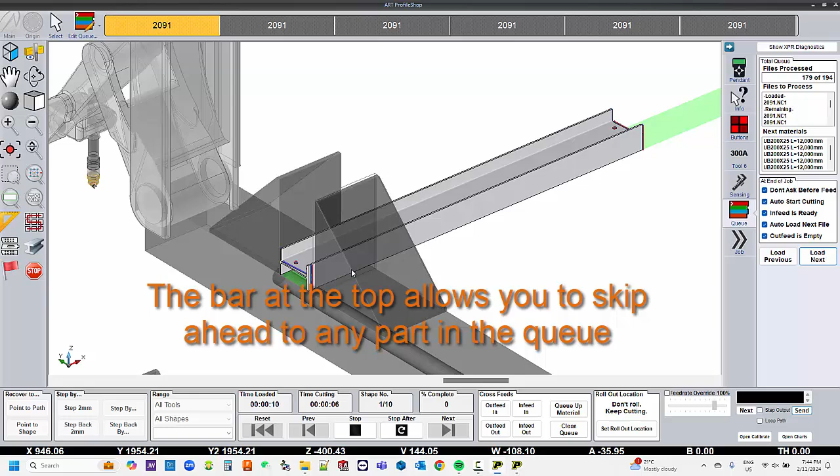That's the hope. It's all about embracing change and investing in the right resources to make sure there's a smooth transition. Well said. It's definitely clear that we're at the beginning of a huge transformation in the steel fabrication industry, with the Metaltek XB1200 and other advanced technologies leading the way. And while there are sure to be some bumps in the road, I'm optimistic about the future. With the right approach, we can use these advancements to create a more efficient, sustainable, and ultimately more rewarding industry for everyone involved. I totally agree.

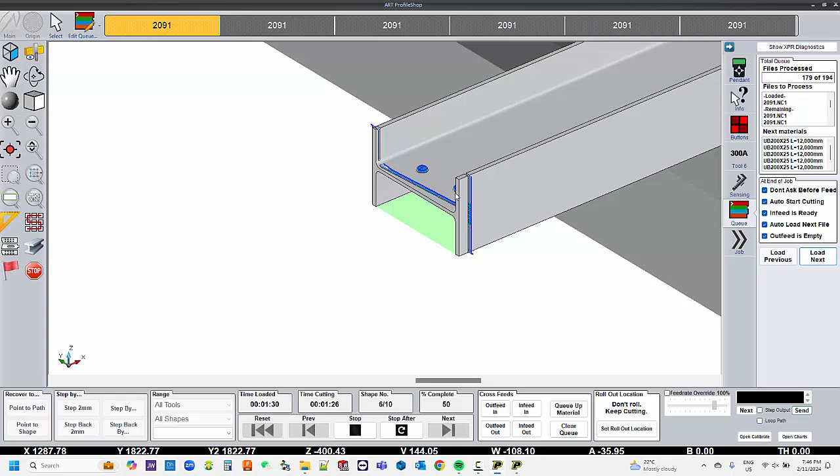Well, we've covered a lot of ground in this deep dive into the Metaltek XB1200. We've explored its capabilities, benefits, and even looked at the bigger picture: its impact on the industry, the environment, and the workforce. I hope our listeners found it as fascinating as we have.

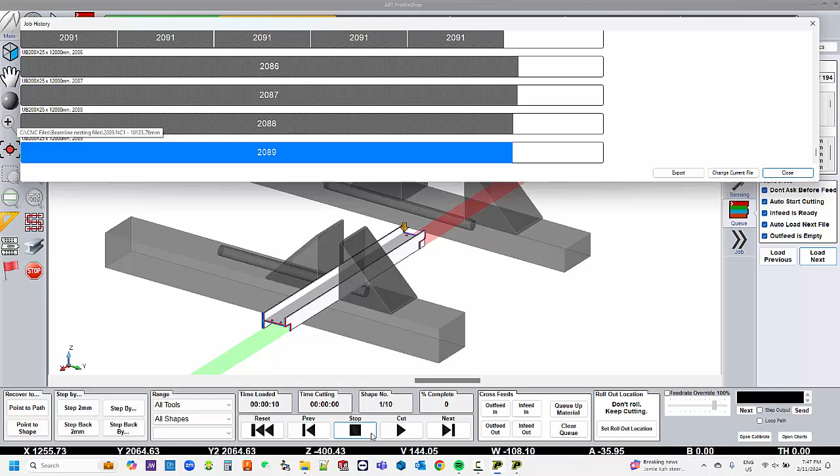Yeah, it's been a great conversation. I always love getting to unpack these kinds of topics and think about what the future might hold. And remember, this is just the beginning of the conversation. Technology is always evolving, so we can expect even more exciting developments down the road. Stay curious. Keep exploring. And who knows? Maybe you'll be the one designing the next generation of steel fabrication marvels.